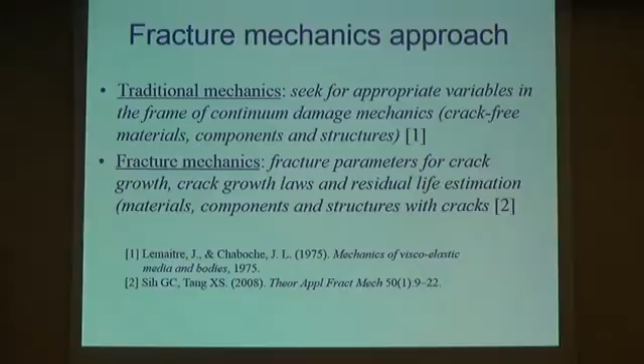So we are also taking the strategy of multiscale. Multiscale is a very popular concept we are borrowing. Actually, the concept we are trying to use is to divide the spatial and the temporal, the space and the time, into different scales.

It's multiscale, and in space we have nano, micro, macro, and even larger scales. And we divide them into several scale ranges, such as micro to macro, nano to micro, and macro to large scales. These scales are just for us to understand the intrinsic properties of material degradation and fatigue.

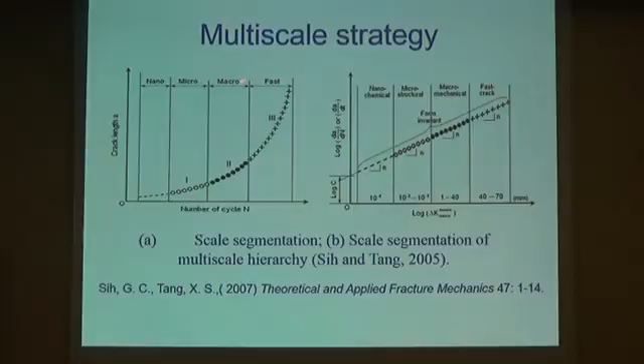So we have this scale segmentation and this multi-scale hierarchy proposed in this framework, and we are focusing on the scale range of micro to macro. So this is beyond the talk of this work.

The previous work established a fatigue crack growth model. This actually was established by Professor Sih, and we based on this model, modified it, and tried to modify some crucial parameters in this model. There are several factors in this model I have to mention.

Firstly, this is the restraining stress. This is the applied load, which pretty much represents the macroscopic loading, and this is the intrinsic microscopic restraining stress. And we also have this macro size and a microscopic feature size, so it's two scales in this model, and the material properties on the two scales are quite different. So the following work actually follows this model, and we use this model to do some transitional works.

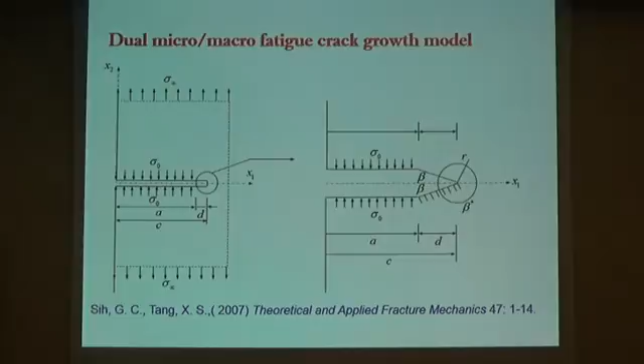Now, this model is quite familiar. It's very similar to Paris law, but I have to point out this incremental strain energy density factor is different from the incremental stress intensity factor. This model is based on strain energy density, and based on the strain energy density, we established this model.

And also considering the multi-scale segmentations I just mentioned, we actually divided this into four scale ranges: pico to nano scale range, nano to micro scale range, micro to macro scale range, and macro to large scale range. And in each range, the expression of this factor, the incremental SED factor, is different.

It corresponds to the different stress singularity, and from top to bottom we have stress singularity 1, 0.75, 0.5, and 0.5. And 0.5 is here, the micro to macro scale range and macro to large scale range. It's 0.5 stress singularity. We use this singularity and this expression to simulate the fatigue growth history.

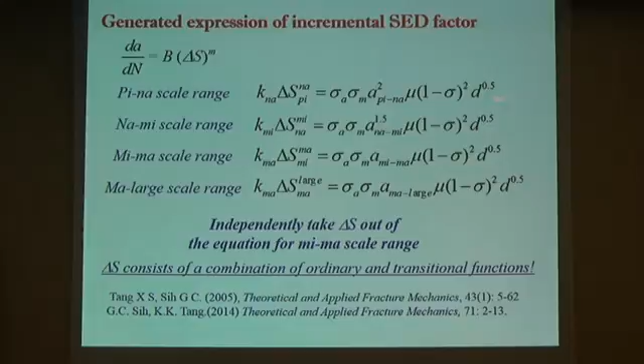And the three transitional functions are the ratio of the material properties, and they stand for three aspects. Firstly, material effects. Secondly, loading effects, and last but not least, geometric effects. These three effects are very crucial in the fatigue crack growth of materials, and we define the material effects, material transitional functions, as the ratio of macro material over microscopic material, and the ratio is always less than 1 because of the material degradation. The value is always less than 1.

And for the restraining stress of the loading effects, we have these transitional functions. It's the applied load and the restraining stress, the ratio of the two, and it's always less than 1. But the geometric effect is different from the two transitional functions, and it's always bigger than 1. And it's an assumption we have to make in this model, based on the material degradation, the geometric change, and also the loading effects.

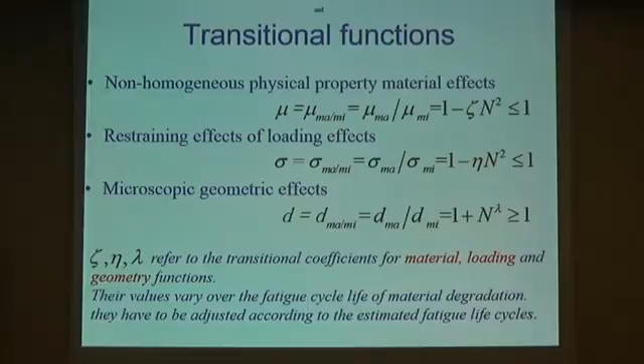And what is the main challenge of this multiscale model? Because we don't know the real change trend of this transitional function, we have to make some assumptions. In the previous work, we adopted this 7075-T6 aluminum alloy and its test data. Using this test data, we did some fatigue simulations, and we got some interesting results here.

This is the test data, the dotted line is the result from Paris law, and the solid line is the result from this model, and we have these two different curves. If you put the curves together with the test data, we find the curve derived from this model fits quite well with the experimental data. But in this work we didn't discuss the variation of the transitional function coefficient.

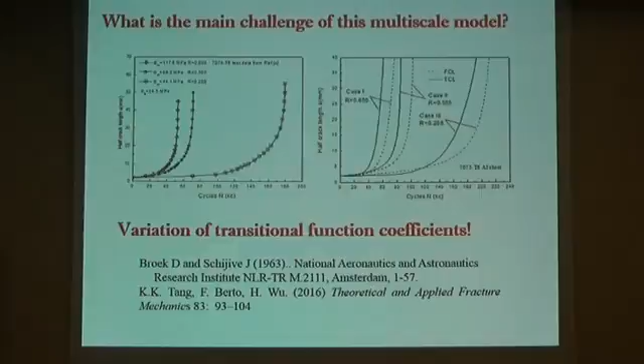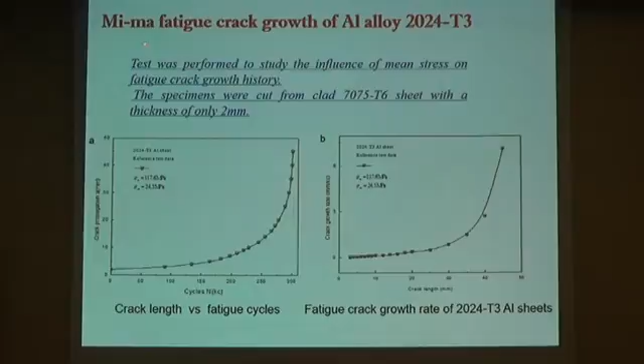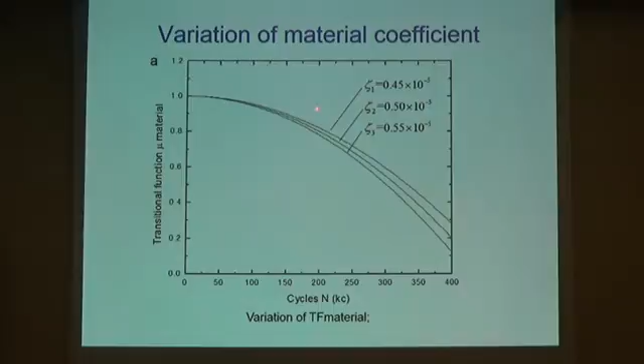Now we want to talk about the variation of these transitional function effects. We take the experimental data from 2024-T3, the scale range micro to macro, and the variation of the coefficient for the material transitional function. We take these values and the linearization of this fatigue crack growth model, and we got these figures. It looks like the material transitional function and the loading transitional function have little impact on the curves.

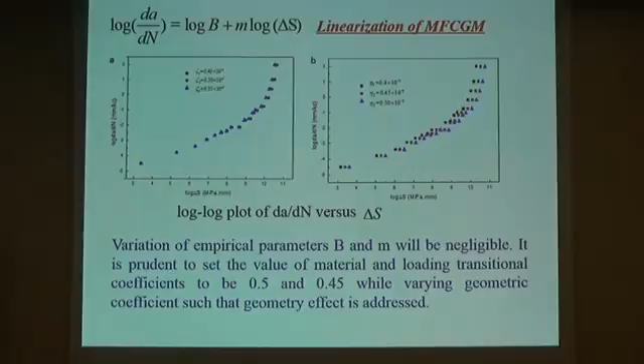So we put focus on the geometric transitional function coefficient. Here we take the values of these coefficients, and we take the log plot of dA/dN versus delta S. We got the empirical parameters B and M for this model. Then we get this.

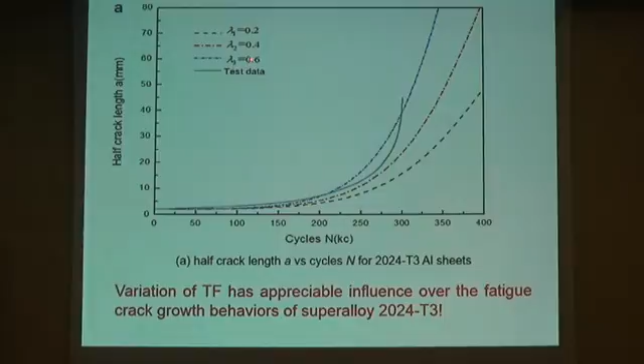The green line is the test data, and the blue lines are for coefficients equal to 0.6, 0.2, and 0.4. It looks like 0.6 fits quite well with the test data, and 0.2 and 0.4 are very conservative, so 0.6 out of the three is the best one. And take a look at the crack growth rates: 0.6 is also closer to the green line test data. So for this set of transitional coefficients for the three transitional functions, the best for this material is 0.5, 0.45, and 0.6.

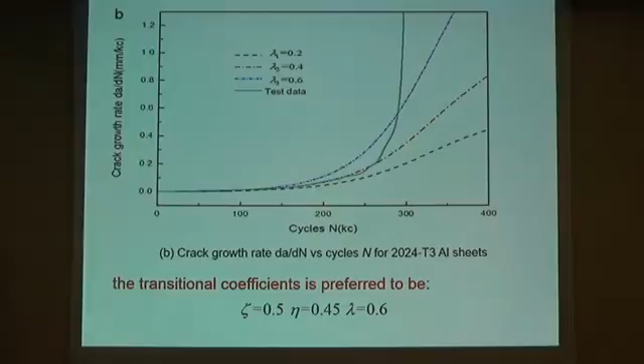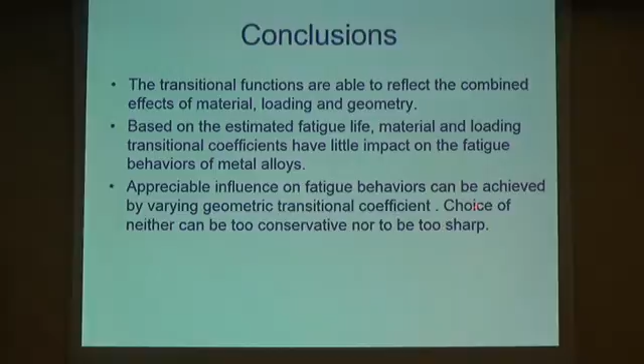Now, the conclusions here: we mainly talked about the variation of the transitional function coefficients. The geometric transitional coefficient has a significant influence on the fatigue crack growth behavior, so we put emphasis on this GTF. The choice of it cannot be too conservative, nor too sharp. So that's my conclusion, my part.